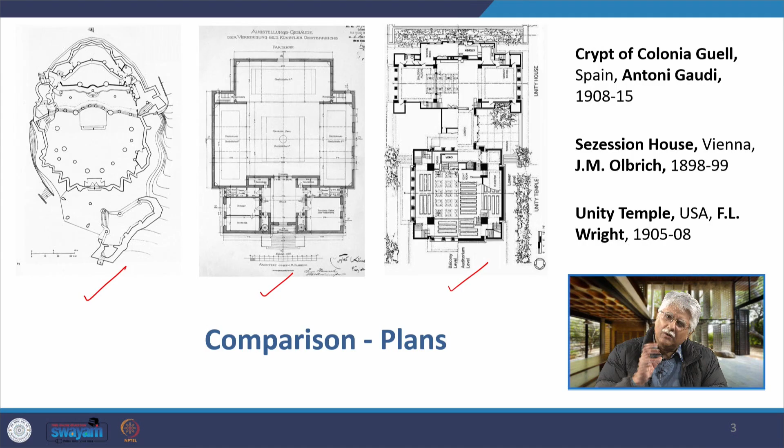Later on we will talk about these concepts called plasticity and continuity, how Wright started looking at buildings' movement not only in the horizontal but also in the vertical direction, and how space should flow freely not only in the horizontal but also in the vertical direction.

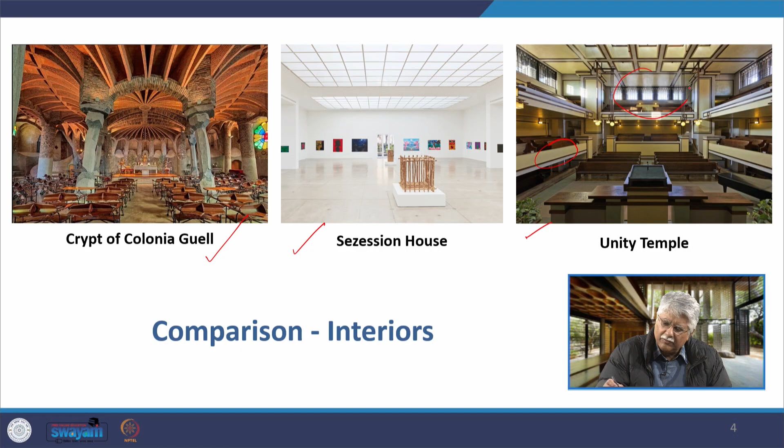How he started coming up with the idea of cantilevered spaces and balconies in a larger space, light coming from above, etc. We will again reflect on these ideas later.

When we come back to the Secession House, we find, as you can see in the plan, it is a very neat and tidy space. Though it has a very strong axis, it is a very modern space with very minimal architecture. It less speaks more in this building.

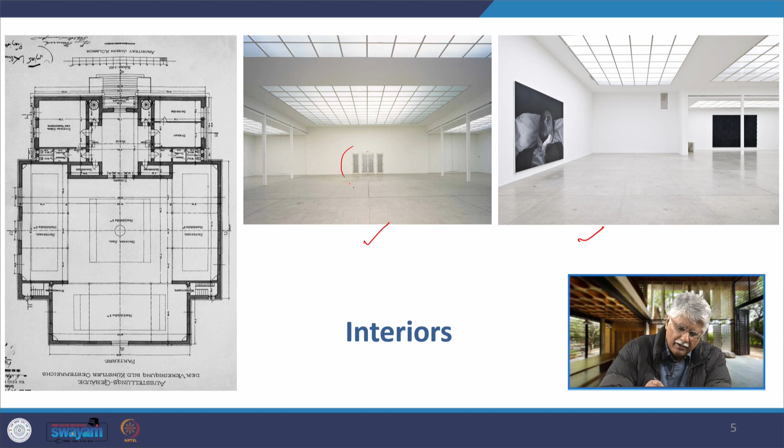You find this interior here and here. This view that you see here—this door, for example, is this door, and this picture has been taken in this direction. This view that you see here is one of the side aisles of this building.

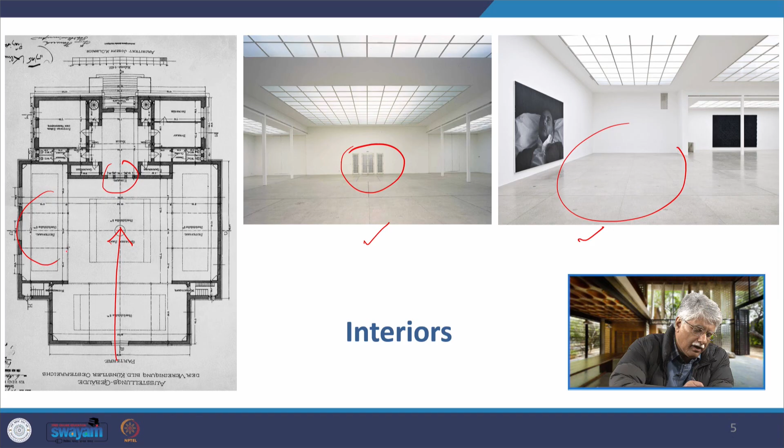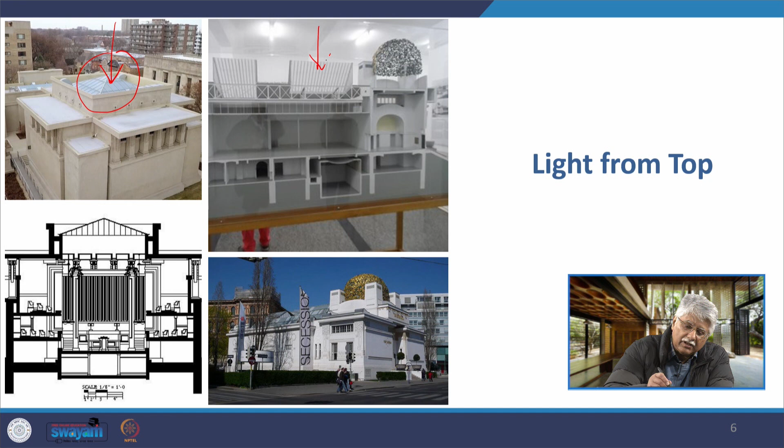Light is captured from the top in both the Secession House as well as the Unity Temple. In the Unity Temple, we find light being captured from the top. And in the Secession House, in this model section that is given here, skylights were given, and light was being captured again from the top.

You can see here the glimpse of the skylight of the Secession House, and this section shows how light was coming in from the top in the Unity Temple, as Wright was also taking in light from skylights above the eye line.

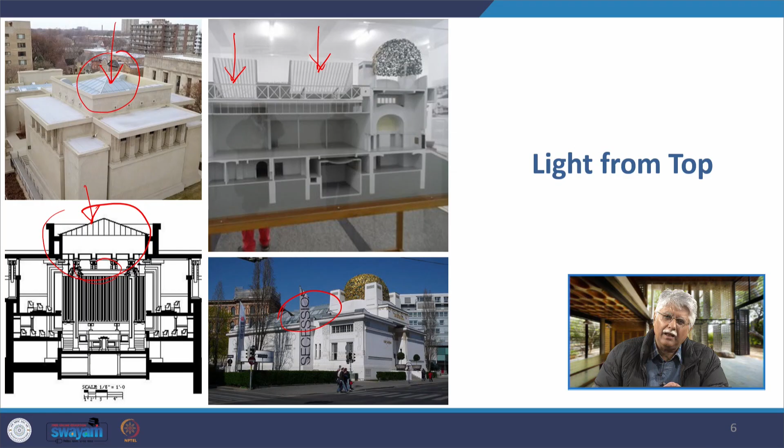Now, if we compare interiors of buildings in modern architecture as they evolve, we find that these large column-free spaces had started coming as a result of new structural systems like RCC and steel, and this happens to be one of the major developments rising out of pure structural technology.

Again, I will make this point here: evolving structural technology, evolving material technology has been fundamental to changes that have happened in architecture. Architecture, again I will repeat, is not the driver of change.

Architecture is driven by change. When change happens in materials, when change happens in structural systems, or even when change happens in economics of countries, or socio-cultural changes happen, architecture also starts evolving, and architecture then becomes a reflection of that change.

That is why architecture is so important when we look back into history and try to understand a civilization, when we try to understand how a people were living in a given era, whether it was Egypt, Greece, or Rome. It is through their architecture that we are able to understand their socio-cultural value systems, their religious beliefs, their economic systems that were in place. Many things we learn about these civilizations, about these peoples, through their architecture. One day when people will turn back and look at our century and our times, they will understand a lot about us through our architecture.

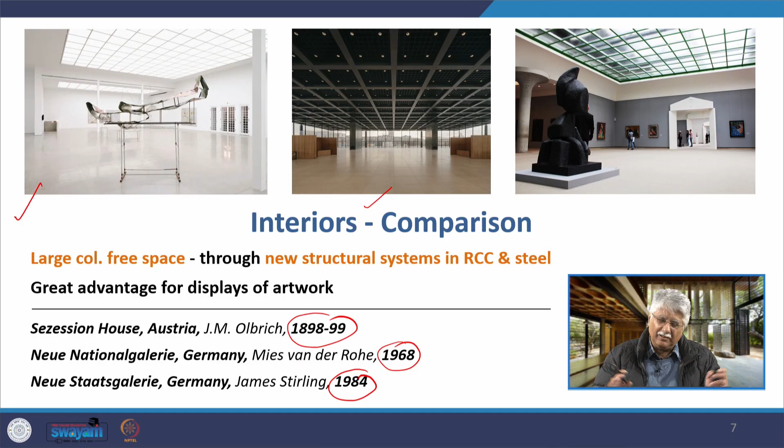Then we have the Neue Staatsgalerie by James Stirling in 1984. All of them are galleries, art galleries. All of them display this example of large span spaces. And then there were many other galleries and museums which reflect the same thing.

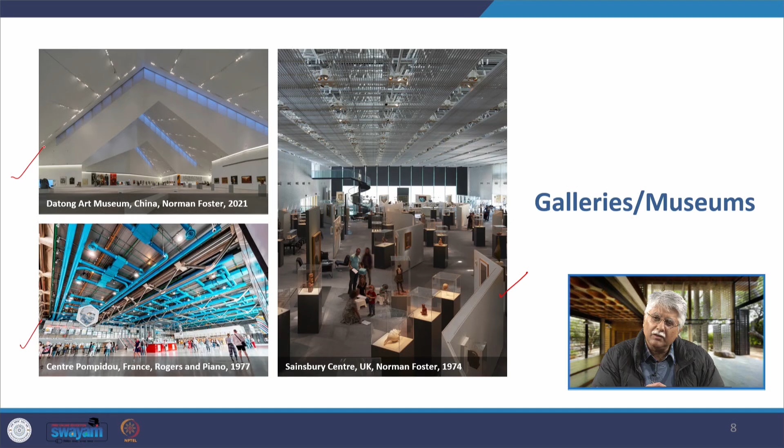All the way up from 1974, the Sainsbury Centre in the UK by Norman Foster, Centre Pompidou in 1977, the Datong Art Museum in China, all the way now very close to our times in 2021.

Then we have the Milwaukee Art Museum that we saw in a lecture before, by Santiago Calatrava. We have the Heydar Aliyev Center by Zaha Hadid. We have the Tate Modern, which is an adaptive reuse building done by Herzog and de Meuron, and we have the Guggenheim Museum in Bilbao, Spain by Frank Gehry.

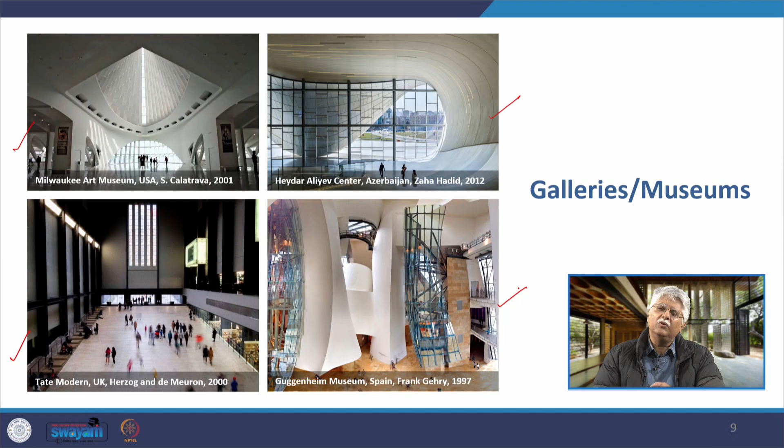Now let us come to what was called mechanomorphic architecture. We have talked about biomorphic, zoomorphic, osteomorphic architecture. Biomorphic means derived from natural vegetal forms, zoomorphic is from animal forms, and osteomorphic is bone structures. Those derivations most radically we have seen in the works of Antoni Gaudí. Mechanomorphic means architecture that is morphed, or derived, from machines.

In the late 19th and early 20th centuries, many elements were inspired by machinery and industrialization, and architects were influenced by these advancements happening as a result of the industrial revolution. Industrial Age 1.0 was truly and firmly in place, and incorporating these concepts and elements symbolic of the industrial age became a kind of trend in architecture.

So we have, for example, the building we will be looking at closely, the Glasgow School of Art by Mackintosh, and we have even buildings like the Postal Savings Bank by Otto Wagner.

Here we find immense use of glass ceiling over the Postal Savings Bank. We find completely exposed steel columns, even with rivets visible in them, and this entire roof in glass has another glass roof above it, which is actually a pitched roof where the snow falls; it bears the load of the snow and is taken off, and then light filters through this ceiling into the main bank working area. Then again there are glass tiles on the floor so that this natural light can somehow even flow beneath, to the floors below it.

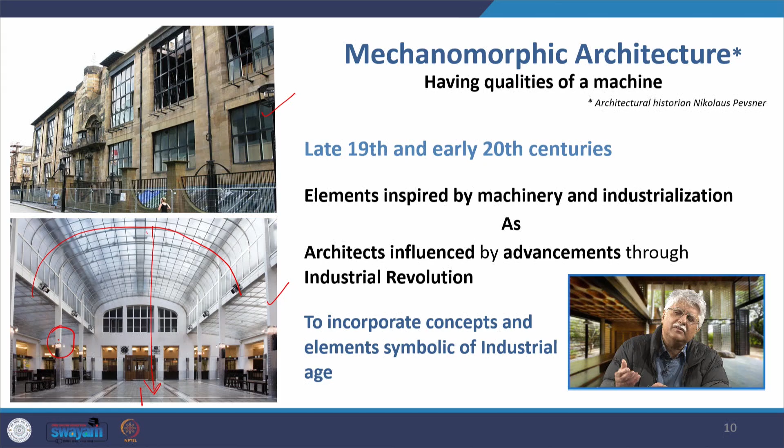Then we also have the building called La Maison du Peuple in Brussels by Victor Horta, from 1896 to 99, which is also a machine-like derivation of a building. Here we find this example of mechanomorphic architecture. It was the headquarters of the Belgian Workers' Party. It had offices, shops, a cafe, and an auditorium.

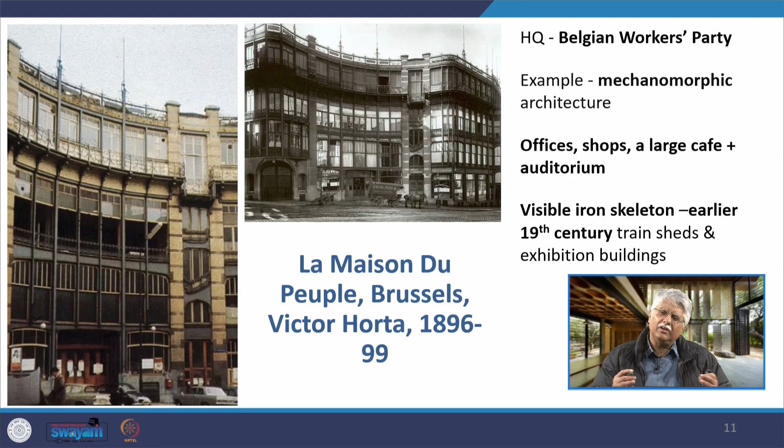And the iron skeleton is a visible iron skeleton, and we've already seen that earlier in the 19th century when we have seen train sheds and exhibition buildings. If not on the outside, at least on the inside, the iron skeleton was visible.

So here we have this. It reflects the influence of both the natural world, because we find these kind of curved or certain Art Nouveau-like elements within the building, but it also shows the technological advances taking place. So we have steel members in the auditorium with rivets visible in them. So both of these are being put together.

We have come to a period in architecture in the Art Nouveau movement where a lot of industrial materials are being used, industrial advancements are being projected in the building. We are seeing the use of exposed steel with exposed rivets, etc. But there is still a restraint because they are trying to convert that into some kind of artistic pieces.

Later on in the 20th century, we find that this kind of conflict completely disappears, and architects start using steel as is, without trying to convert that into some kind of an artistic element.

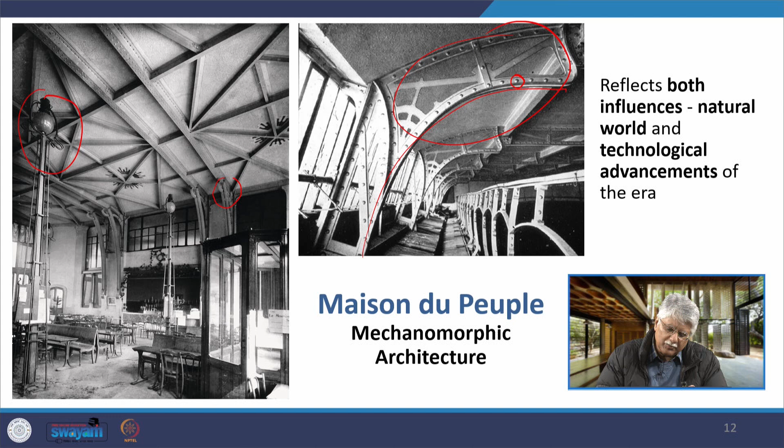So in Maison du Peuple, which is mechanomorphic architecture for you again, there is now what we find a growing harmony between the facade and the interior. One of the things that was problematic about Industrial Revolution architecture was that the exterior and interiors didn't really connect with each other.

When we look at, for example, the St. Pancras station that I talked about earlier, we find the facade is a combination, it's an eclectic facade. It has Greek, it has classical members, it's got Gothic features, Renaissance features, etc., all incorporated within the facade. But when you go on the inside and see the shed, you find that the shed is completely in iron. So it seems as if we are looking at two different buildings. There is a disconnect between the outside and the inside.

But when we come to the Maison du Peuple, slowly and surely there is a connection between the outside and the inside. The building starts speaking the same language. On the outside also we see the building is machine-like, and on the inside there are these exposed steel members responding to the industrial age.

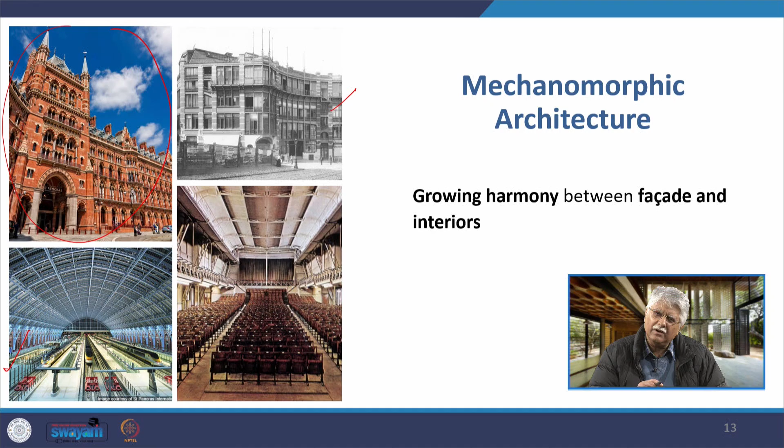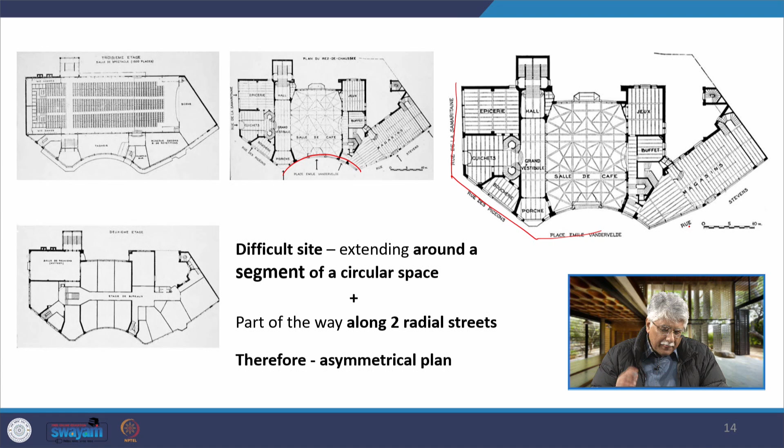So this building was actually built on a difficult site because it extended around a segment of circular space that you see here, and part of the way it was along two radial streets, and so the plan itself is totally asymmetrical. And now another building came up in the 1970s which is called the Willis Faber Dumas.

Like I told you in the earlier lecture, I will continue to do this. I will continue to connect the buildings of an earlier period with the buildings of a later period, so that you can see how there is a connection in how the buildings have evolved, how the past buildings are connected with the buildings of today.

In Willis Faber Dumas, it reinforced the urban scape in which the building was present. In that, this building also had a very asymmetrical site, and the entire envelope of the building was along the asymmetrical site. It was a very free-form plan. It was a low-rise construction responding to the scale of the surrounding buildings.

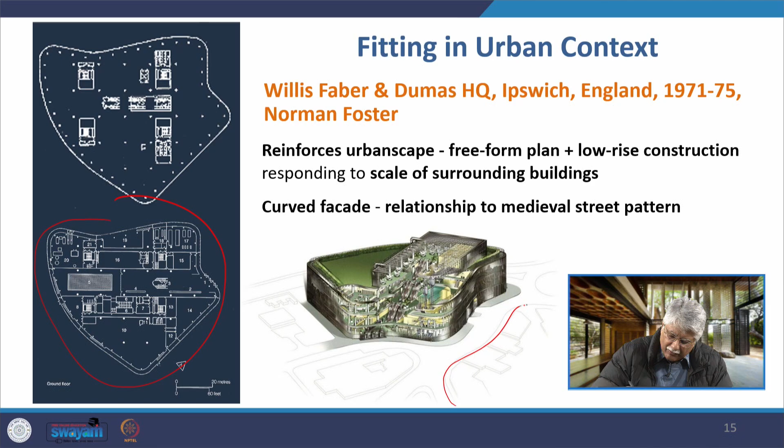It was a very curved facade, and that was in relation to the kind of medieval street patterns that you are able to see here around the building. So it fitted in the urban context.

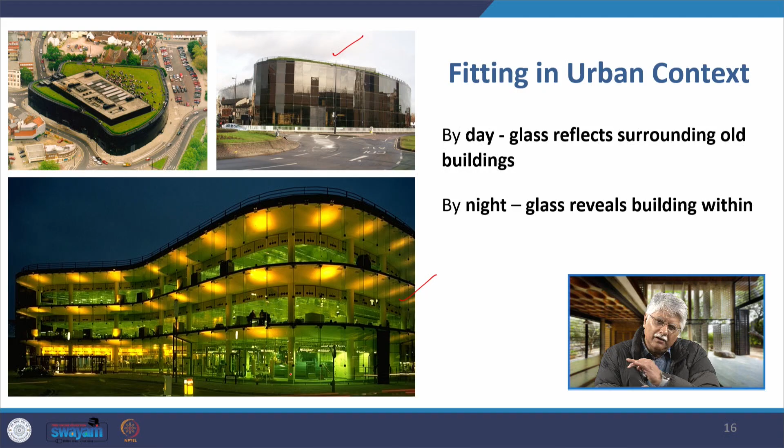By day, the glass reflects the surrounding old buildings. You can see that here. And by night, the building reveals itself. The building reveals its interiors to us, and this is that period, that era had come when the buildings were in complete glass envelopes.

Even the in-between mullions, etc., had more or less disappeared, and it's a continuous glass facade reflecting the interiors. Moreover, it was also an early example of energy-conscious design. It was a very deep plan. It had an insulated grass roof when the concept of green roof had not yet come in, but this building has a grass roof or a green roof, ensuring good thermal performance, and it was planned on a flexible 14 square meter structural grid. So this turned out to be one of the seminal buildings of that period, and it is part of the high-tech architecture group.

This is the work of Norman Foster, so it falls within that purview, and we will reflect on this hopefully again in later lectures.

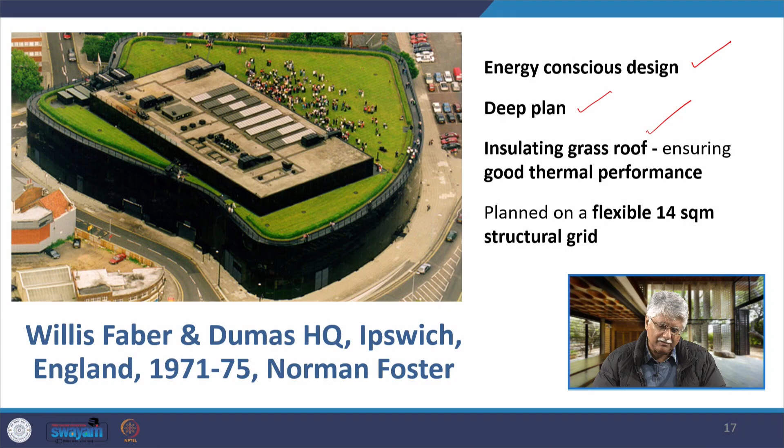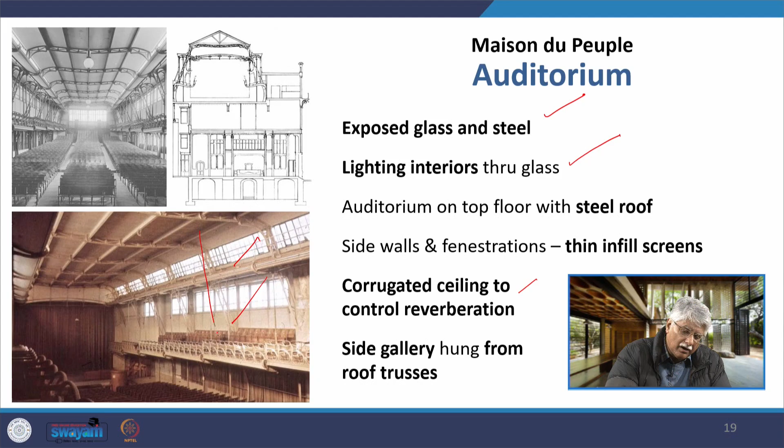It's a corrugated ceiling in order to control the reverberation, and the side galleries have also been hung from the roof truss.

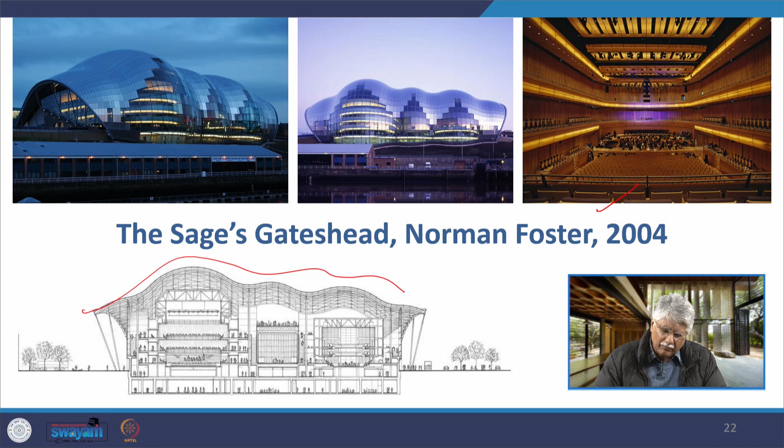Now if we look at Sage Gateshead a little more closely, like I said, it's an example of a single envelope design, and in the section you can see the glass envelope, which is in a very wavy form enclosing this entire space.

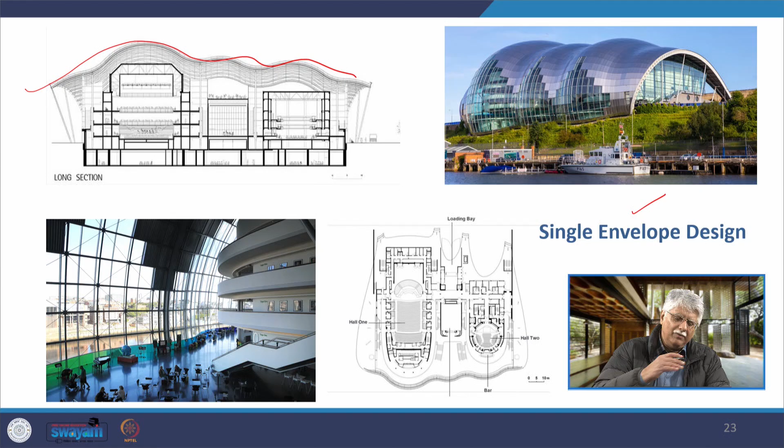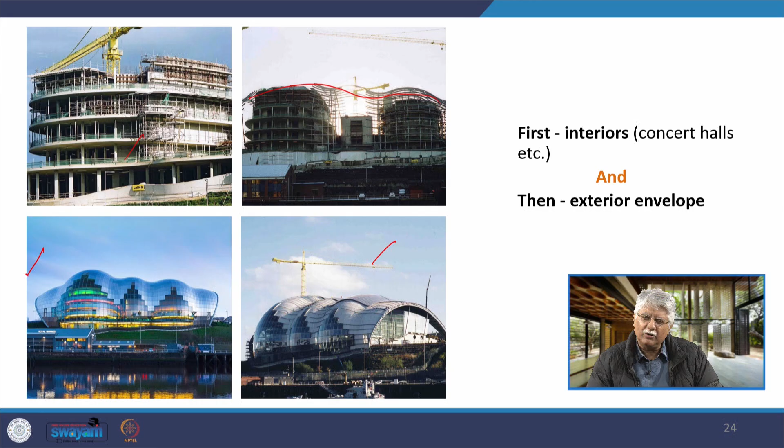When the building was constructed, it was built inside out. First the interiors were constructed, that is the concert halls, etc. Then the envelope was generated or constructed over it, and thus the exterior envelope was made on top of it. So the outer glass and steel shell encloses 3 concert halls, bringing them together as one.

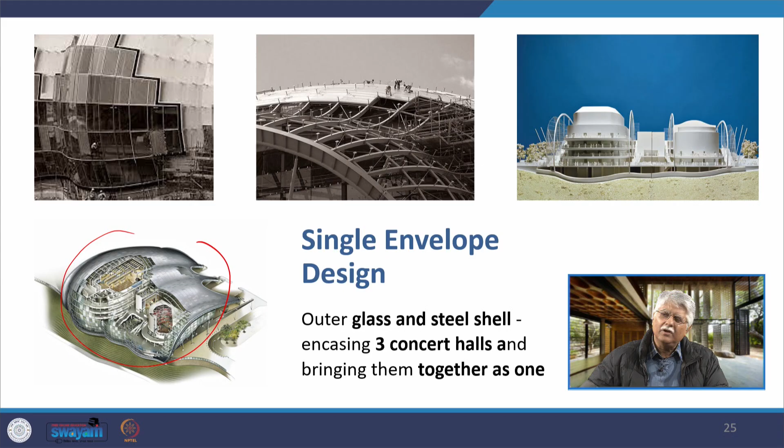This is a concept that we see repeatedly happening in modern airports, where there is a single envelope enclosing many facilities within it.

Now coming back to the building that we want to focus on today, which is the Glasgow School of Art, or GSA, by C.R. Mackintosh. This is called the GSA Mackintosh building.

The Glasgow School of Art is several buildings. This one was designed by C.R. Mackintosh, and he was a prominent architect of the movement coming from Britain. Mackintosh's architectural masterpiece is the Glasgow School of Art, and it is a mechanomorphic interpretation.

As you can see here, even in this example, it is a very heavy looking building. It's made out of stone, but the structure of the building is actually RCC, and the stone is used as a cladding material. Why do I say this is an RCC frame structure? Because of these very wide glass openings that have been provided, which point us in the direction that the building has a frame structure.

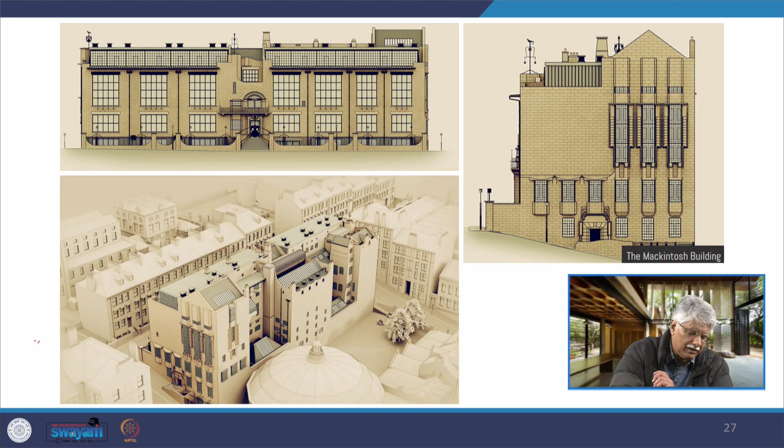This immense use of glass in the facade is the library part of the building, and light is also filtering in from the top, which we will look at. These are the drawings, and this is the 3D model or 3D view of the building. UG, PG and PhD courses are offered in architecture, fine art and design at GSA.

Art Nouveau features, when you observe closely, include the wrought iron gate here, and these wrought iron elements that are provided in front of the glass windows.

The entrance of the building, and in fact the overall way stone has been used, gives the resemblance of a castle. The entire facade at the entrance resembles a castle, and the building has a very solid and simple geometry in a plain facade using stone and glass. Interiors are in wood, iron and glass.

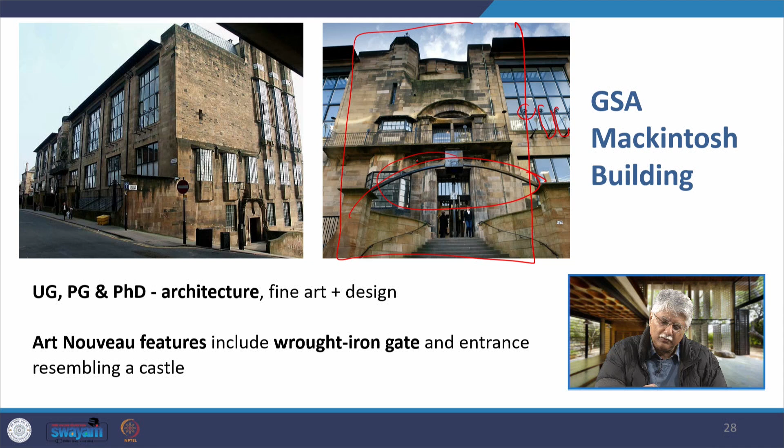Now one thing I want to talk about is the idea of asymmetry in symmetry in architecture. When you look at the overall building, it looks symmetrical, but at the center part, from where the central axis can be taken, you suddenly find that Mackintosh breaks the symmetry. This entrance gate is not symmetrical. If you look closer, you find it is off center. He could have easily made it completely symmetrical, but breaking the symmetry creates a certain kind of interest in the building.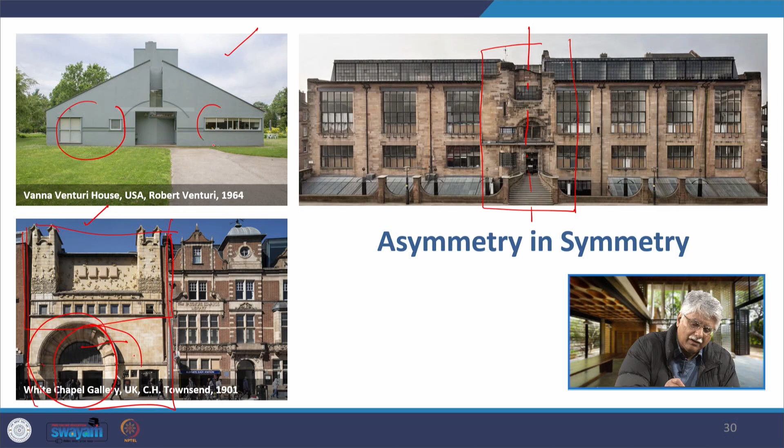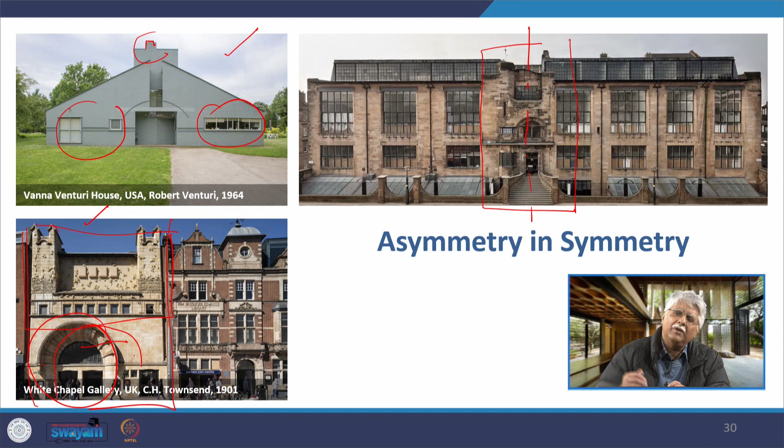The overall form is symmetrical, but the chimney has a member which is off center. The overall building is symmetrical, but there are these points of asymmetry within it. So this is called asymmetry in symmetry. I am pointing this out to you in the hope that these points will help you when you design your projects.

Another way of looking at architecture is when a building is perfectly symmetrical, like you find in the Taj Mahal, or perfectly asymmetrical, like you find in Frank Gehry's buildings. You find very strong symmetry in modern architecture also. Symmetry is not just confined to classical or Egyptian architecture. We find it in the Bangladesh assembly, the Jatiya Sangsad Bhaban in Dhaka by Louis Kahn, in the Louvre Pyramid in Paris by I.M. Pei, and in the TWA terminal in New York by Eero Saarinen in 1962.

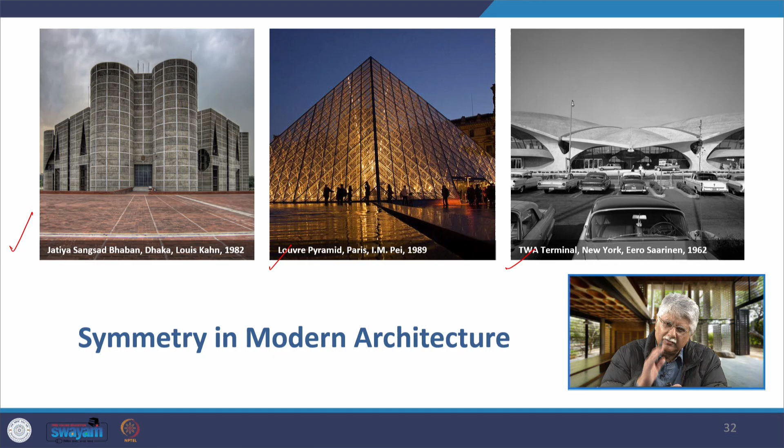In these buildings, whether in glass or RCC, whatever the cladding material, they all had very strong symmetry. We find symmetry even in skyscrapers: the Petronas Towers in Kuala Lumpur by Cesar Pelli, our own Lotus Temple in New Delhi by Fariborz Sahba, and the IST building at Florida Polytechnic by Santiago Calatrava. So there are three ways: perfect symmetry, perfect asymmetry, or asymmetry within an overall symmetry.

When we look at the plan of the GSA building, we find it's a modern rational plan. It might be coming out of our own design studios. Very simple, straightforward, and based on the building's function. This is one of the early examples where architects kept function on priority over form. In the past, form superseded function. This change started with neoclassical architecture, gradually penetrated architecture, and by the 20th century it was taking very strong roots.

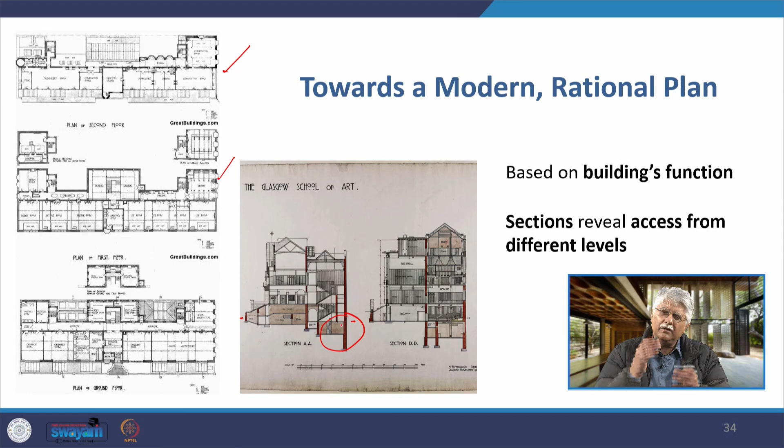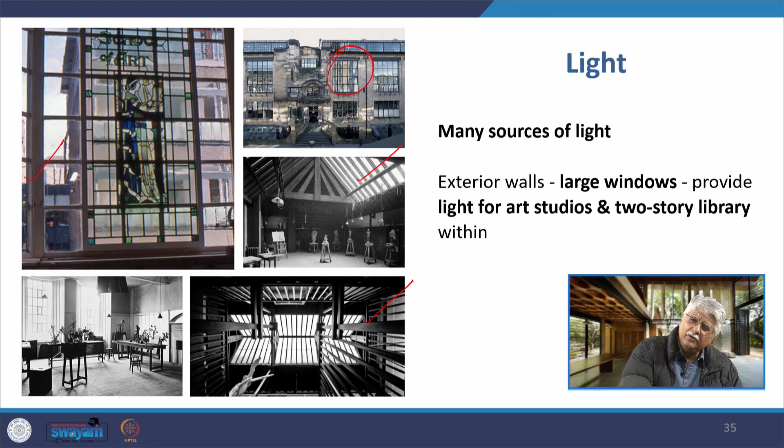The section reveals access to the different levels of the building, because of the two roads on either side; one road slopes downwards, and they have taken advantage of that with access at different levels. Light comes in directly from the glass facade, from skylights, and from large windows in exterior walls for the art studios and the two-story library. The extension of the Glasgow School of Art was the Seona Reid building, designed by Steven Holl.

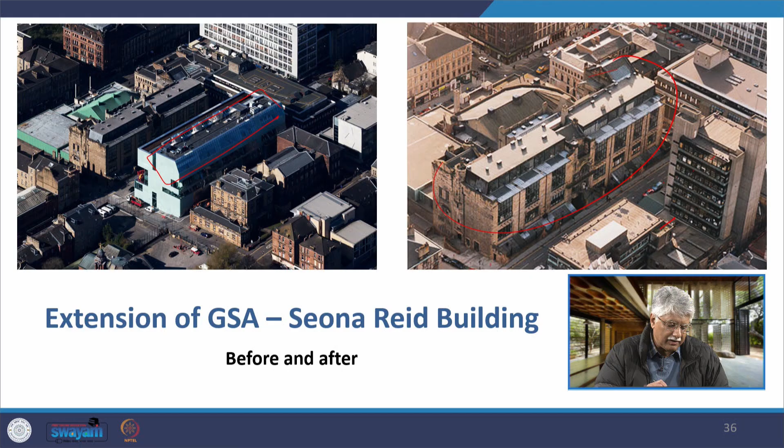In this picture, the Seona Reid building is not there. You see the Glasgow School of Art here, and this is what the site used to be. In this picture, the building has come up here. This is the Seona Reid building, done by Steven Holl as an addition to the Glasgow School of Art. I am discussing it because I want to talk about complement and contrast in architecture. When a building gets an addition, you can complement it completely, contrast it completely, or have a mix of both.

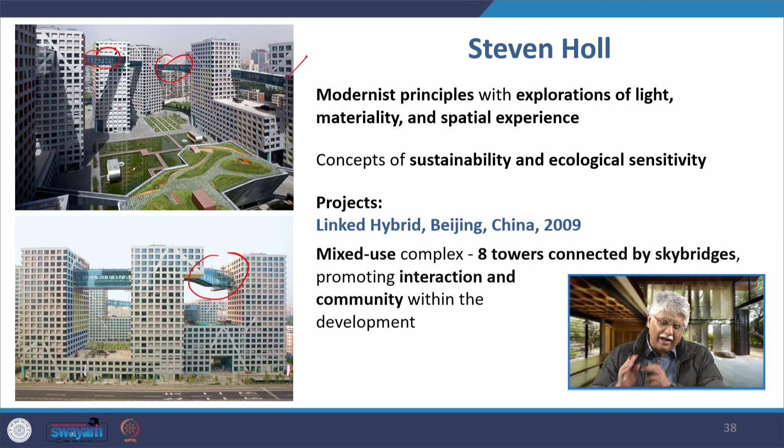Steven Holl has based his architecture on modernist principles, explorations of light, materiality, the use of materials in construction, and the overall spatial experience. He focuses on sustainability and ecological sensitivity. For example, the Linked Hybrid project in Beijing, China, in 2009 is a mixed-use complex with 8 towers connected by amazing sky bridges, promoting interaction and community. Steven Holl also provided the extension of the Nelson-Atkins Museum in Kansas in the US, and this is the existing building.

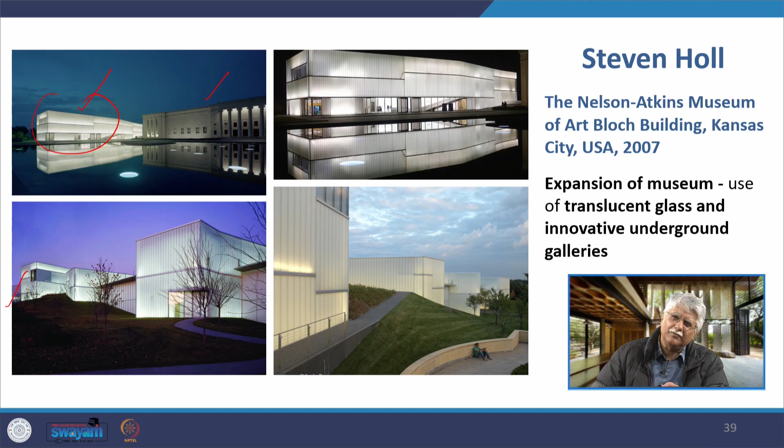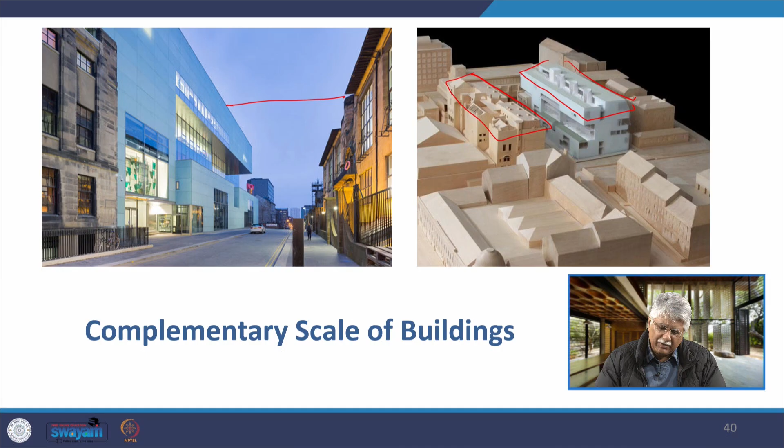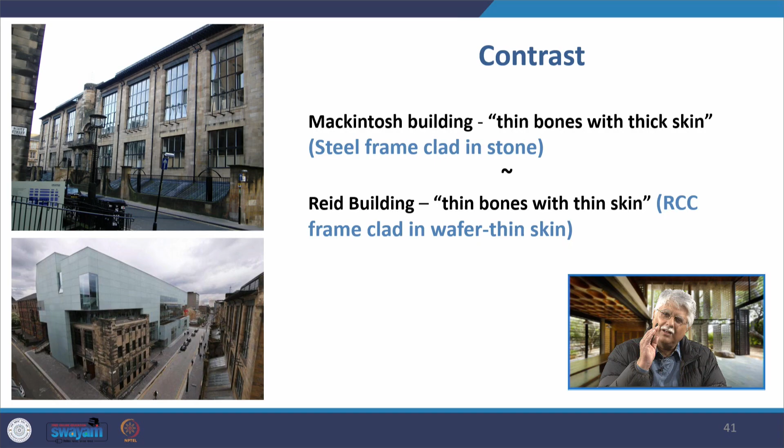The contrast is the Mackintosh building can be said to be thin bones with thick skin. It has got a steel frame, I am sorry, not an RCC, but a steel frame clad in stone, whereas the Seona Reid building is thin bones with thin skin. It has got an RCC frame clad with a very, very thin skin on top of it, and that is how he has done it.

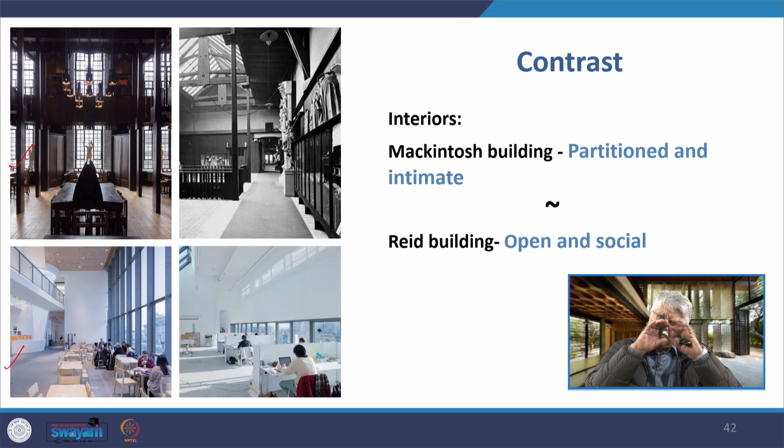And the interiors, Mackintosh's building is partitioned and very intimate. The Seona Reid building, on the other hand, is very open and it is more social. So you find the use of darker colors within the Mackintosh building makes it more intimate. You find the use of lighter colors and the feeling of much more lightness, or the overall light penetration also is greater in the Seona Reid building.

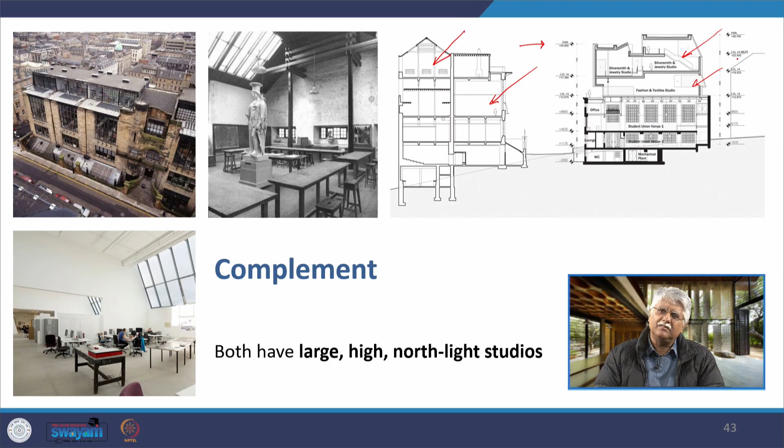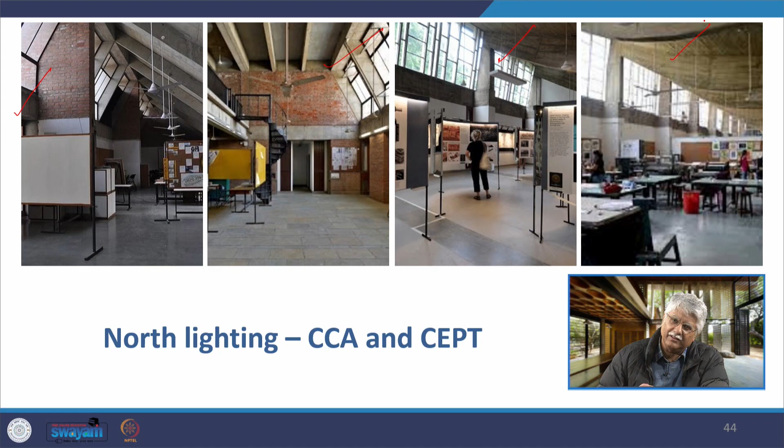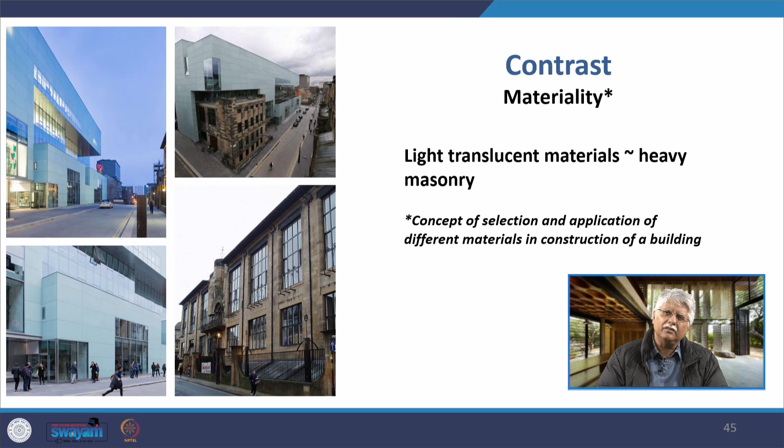The contrast is in the materiality. Materiality is the concept of selection and application of different materials in the construction of a building. Here in the Seona Reid building, he uses light and translucent materials versus heavy masonry used in the Mackintosh building. Now, there is tremendous transparency in both the buildings. There is transparency in the GSA in the way that it brings in a lot of light inside the building, and that continues in the Seona Reid.

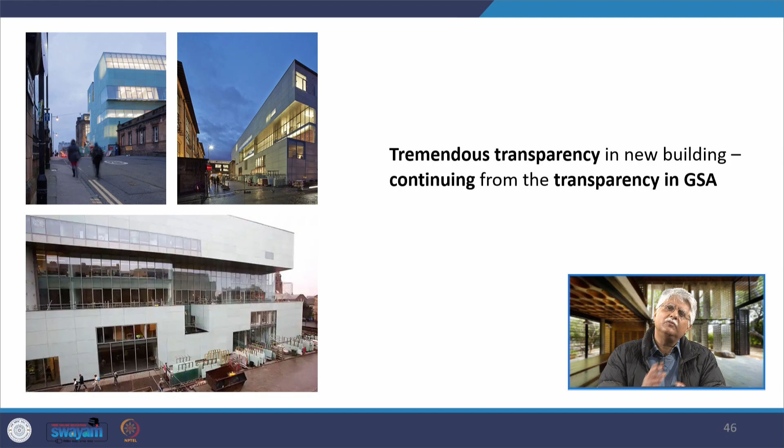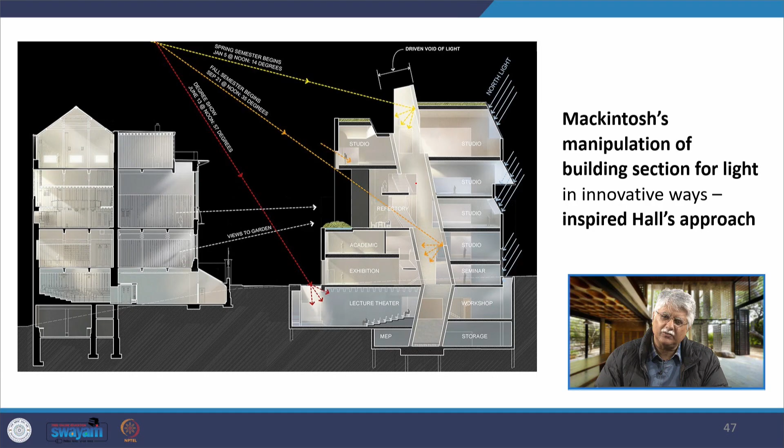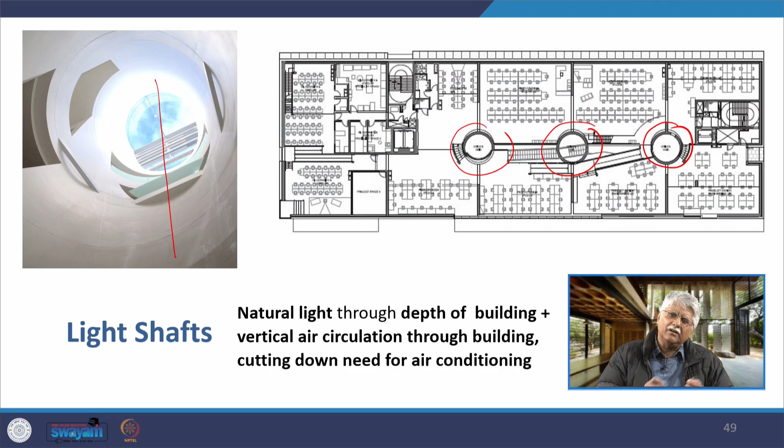Mackintosh's manipulation of the building section for light is an idea that has also inspired Hall's Seona Reid, and he also manipulates the section of the building to pull in maximum natural light. Another idea that GSA uses to pull in light is the use of a light shaft in the center of the building. In fact, as you can see in the plan, there are 3 such light shafts, in which natural light comes deep into the building, and it also aids in vertical air circulation through the building and cuts down the need for air conditioning.

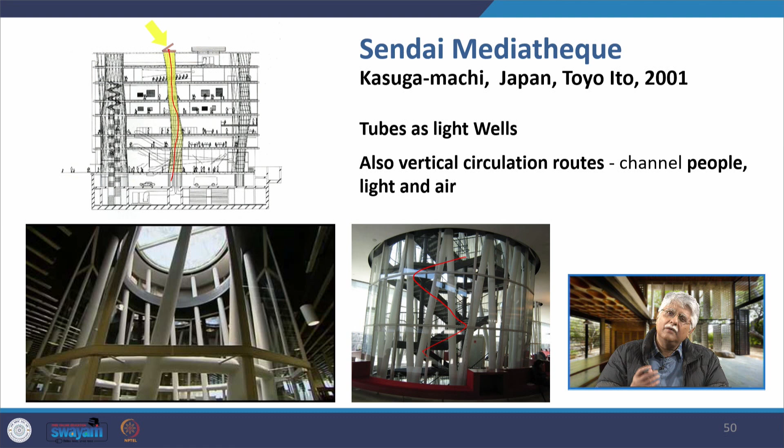This concept of a light shaft is also seen in the Sendai Mediatheque, and it is used in this project, which was done in 2001, in a much more complex way. These light shafts are actually tubes which are also the supporting vertical members of the building, and these tubes act as light wells. They are also used for providing vertical circulation through staircases or even elevators, so we can use them for vertical circulation of people and for bringing in both light and air into the building.

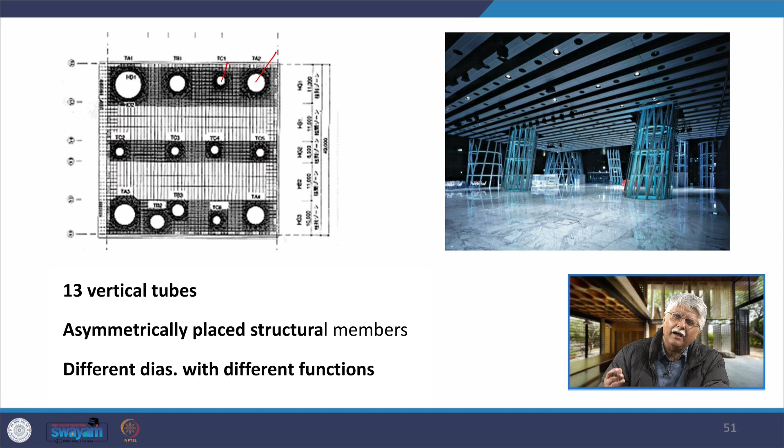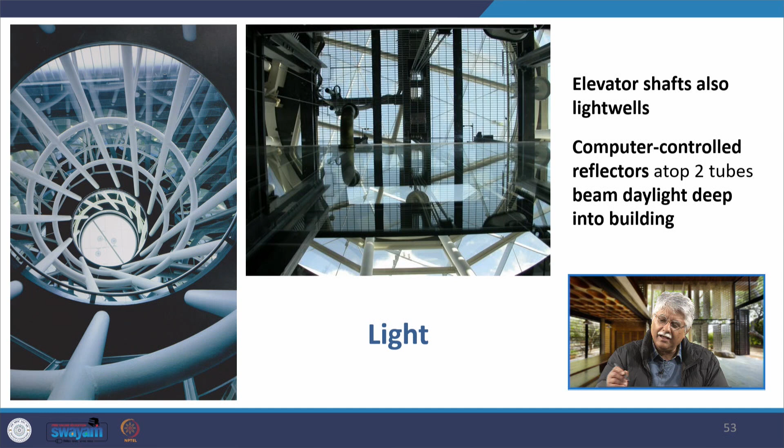So it has got these 13 vertical tubes, contrasting from one another, asymmetrically placed structural members. These tubes are actually the column supports of the building, and they have different diameters and are used for different functions. So the light is also entering into the Sendai Mediatheque through these vertical tubes, as you can see here, and the elevator shafts also work as light wells.

One more thing about this building is that it has got varying floor heights. It doesn't have the same height. Now, what is a mediatheque? Let's look at that. It initially began with the idea of building a library, but then they realized that now libraries are not only about books, libraries are also about multimedia.

Therefore, they came up with the idea of having a mediatheque in which it will not just be books, but varying medias and videos and digital libraries, etc., all put together in this one building to be used by the people. And based on the function, different levels have different functions. The heights of these different levels is also varying. How did they achieve that is very interesting.

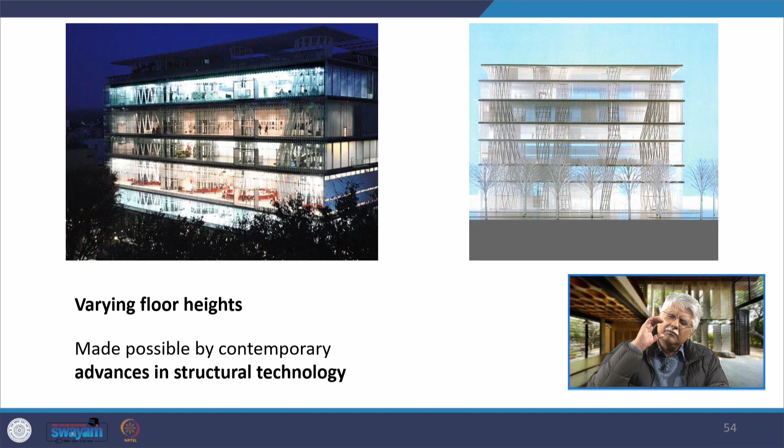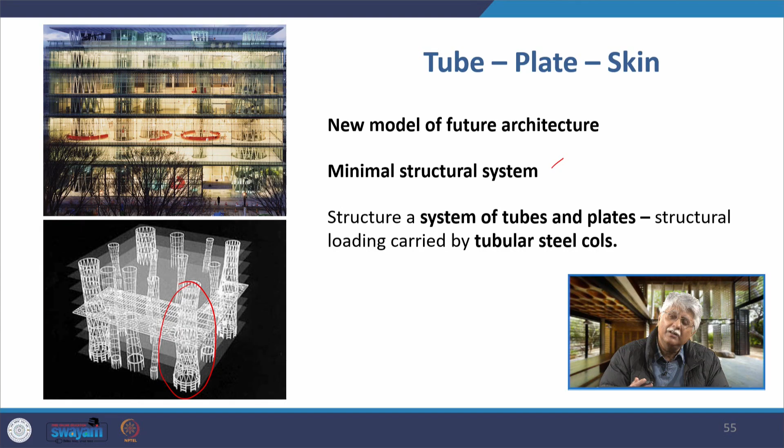This is one of the most innovative structural buildings that we find in the 21st century. It is in fact a new model for a future architecture, because the structural system in fact is minimal. It is a system of tubes and plates. The structural load is being carried by these what I termed as light shafts in the Seona Reid building, light tubes here. So these tubular steel columns not only are working for bringing in light or vertical transportation, but they are actually the steel columns of the building.

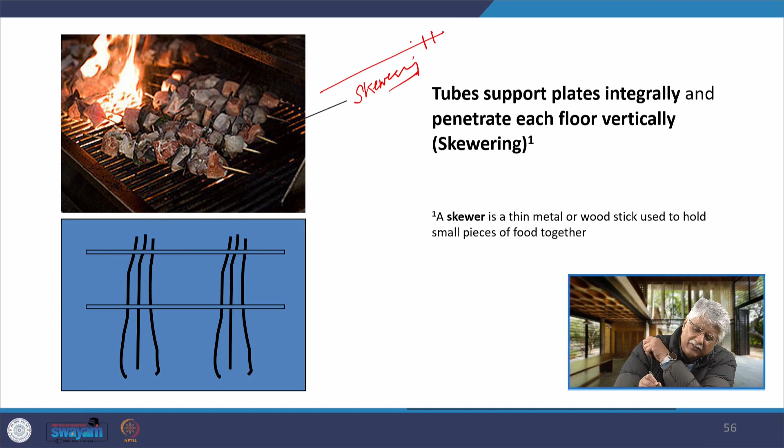Now how does it work? It's based on a simple concept of skewering. In skewering, if you have ever seen how kebabs are made, in any form of kebabs, you find that there is an iron rod that is used for what is called skewering. You keep on adding the pieces of the material, eating material, on the iron rod like that, and when you have the rod, you keep on piercing the material one after another like that, and then you cook it. This skewer is a thin metal or wooden stick which is used to hold these small pieces of food together.

Now in the Sendai Mediathek, this is what they have done. They have taken these columns and they have skewered the floors of it. So now when you are skewering the floors, you can decide to keep the height of the floors different. Based on where you want to have the floor, you can skewer it there, right. So each floor, the tubes are supporting these plates integrally and penetrate each floor vertically. So this kind of structural system is not having columns supporting a slab and then the column continues in supporting a slab. This actually has columns running through and through supporting slabs which are also at varying heights from one another. Very interesting system. I have told you in a very simple way.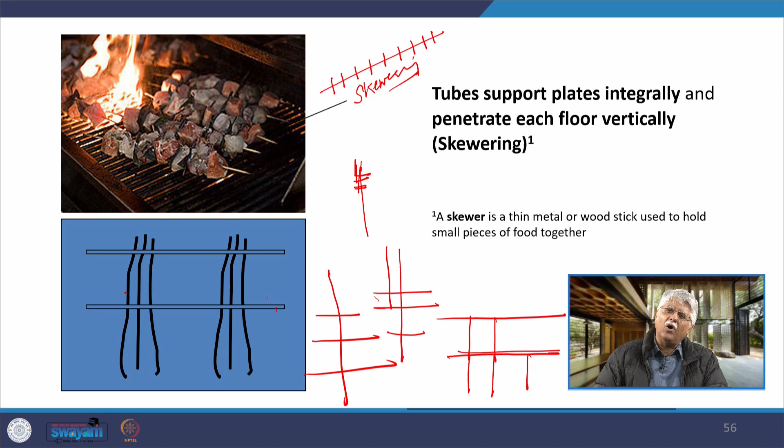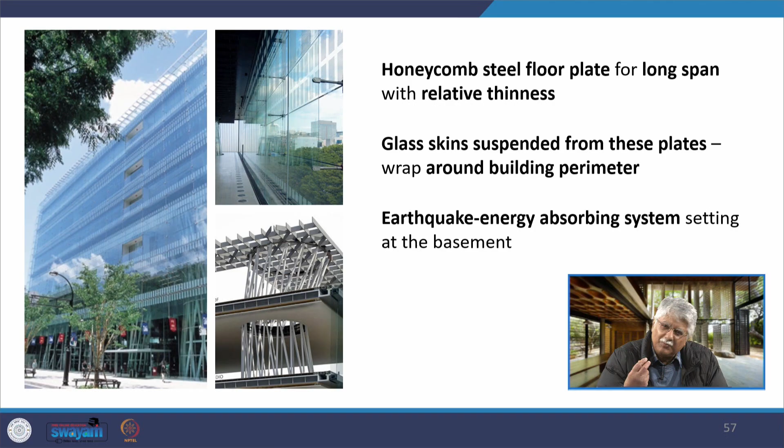The engineer behind it is Sasaki, and I would like you to go online, you can read that paper, because this was a very complicated structural system that Ito had thought of, and Sasaki was able to implement his idea into this building. It has got a honeycomb steel floor plate which is relatively thin and is able to take the long span of the building. The glass skin is wrapped around the entire building which is suspended from these floor plates, and it has also got an earthquake energy absorbing system in the basement. This is one of the more futuristic buildings that have come up in terms of the structural innovation it has brought into the 21st century.

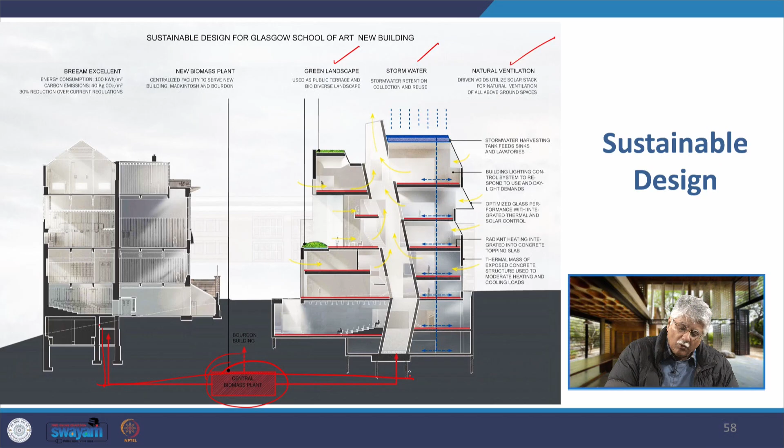Coming back to the Seona Reid building and GSA, we find that they both exhibit sustainable design. The Seona Reid building has incorporated green landscape, storm water management, natural ventilation is already there, and it has also built in a new biomass plant which is being used, and it is connected both to the older GSA building and to the Seona Reid building.

Now coming to the Purkersdorf Sanatorium, I am talking in continuity about mechanomorphic architecture and how it was leading on to the early buildings of modernism. I was focusing mainly on C.R. Mackintosh and the GSA building and how it was emblematic of the radical change that had come in through the Art Nouveau movement, using of natural forms, etc. The Art Nouveau movement lasted a very short time, 1890 to 1910. The use of natural forms, like the way Victor Horta has used them and more radically how Gaudi had used them, that also more or less disappeared after 1910. But what remained from the Art Nouveau movement was this mechanomorphic derivation.

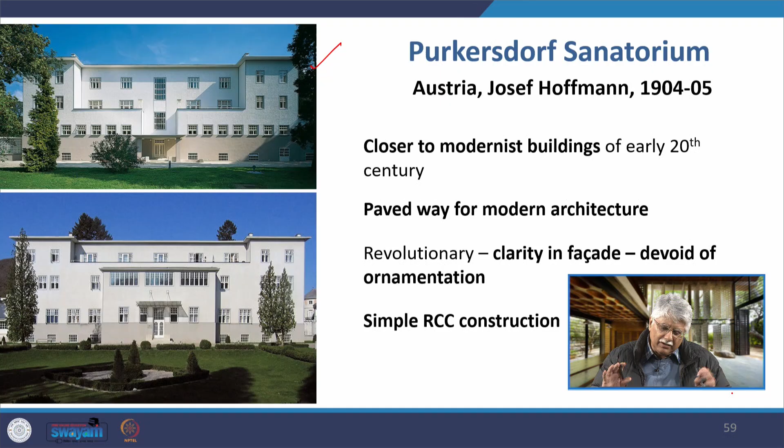All those changes that happened in Art Nouveau were ultimately leading to buildings like this, the Purkersdorf Sanatorium in Austria by Josef Hoffmann. It is closer to the modernist buildings of the early 20th century and paved the way for modern architecture. It is revolutionary because of the clarity in the facade. It is devoid of all ornamentation. It has got a very simple RCC construction. There is both simplicity in elevation and the interior spaces. There are some elements related to Art Nouveau architecture in the interiors, but in general it is a very modern looking building, as I would put it.

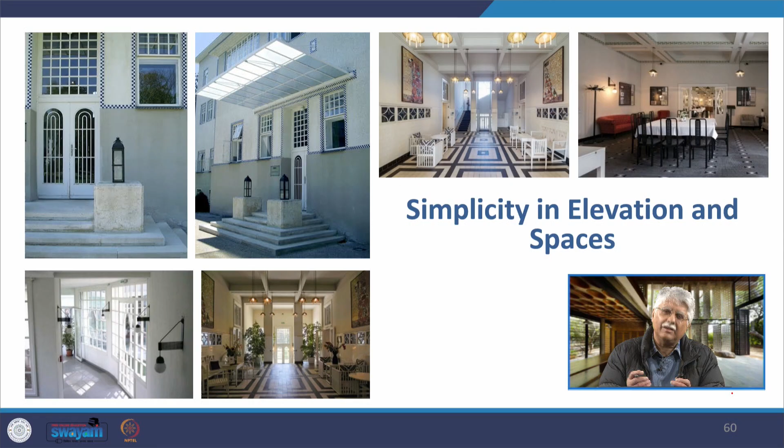Over time, the need for sanatoriums disappeared because of new treatments that came in. Tuberculosis no longer needed isolation. Therefore, buildings like the Paimio Sanatorium have now taken on other purposes over time, but the buildings still exist.

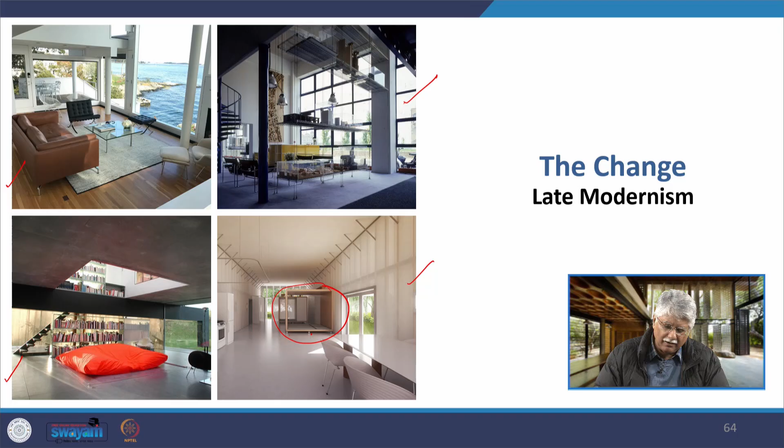Modernism was thus getting firmly established in the early years of the 20th century. What is modernism? It is the rejection of traditional forms and adoption of new technologies and materials—the use of industrial materials like steel and concrete—with the fundamental concept given to us by Louis Sullivan, who said form ever follows function, reduced in modern times to the simple dictum: form follows function. There is simplicity with clean lines and clean geometric shapes, unornamented and plain facades.

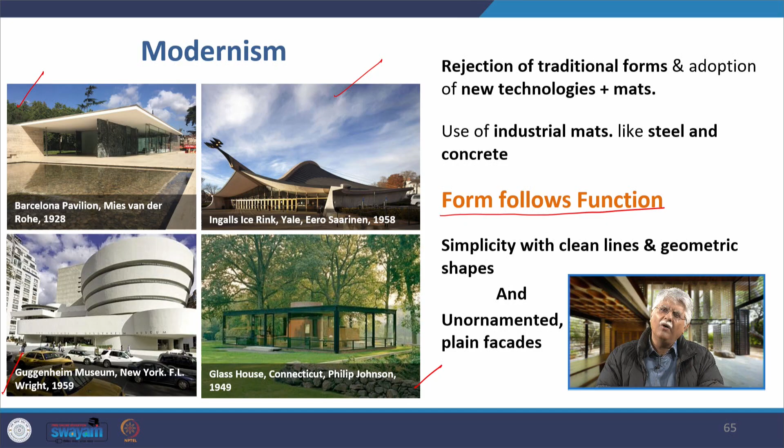Examples include the Barcelona Pavilion by Mies van der Rohe in Barcelona in 1928, the Ingalls Ice Rink by Eero Saarinen in 1958, the Glass House by Philip Johnson in 1949, and the Guggenheim Museum by Frank Lloyd Wright in 1959. All these buildings are a part of modernism.

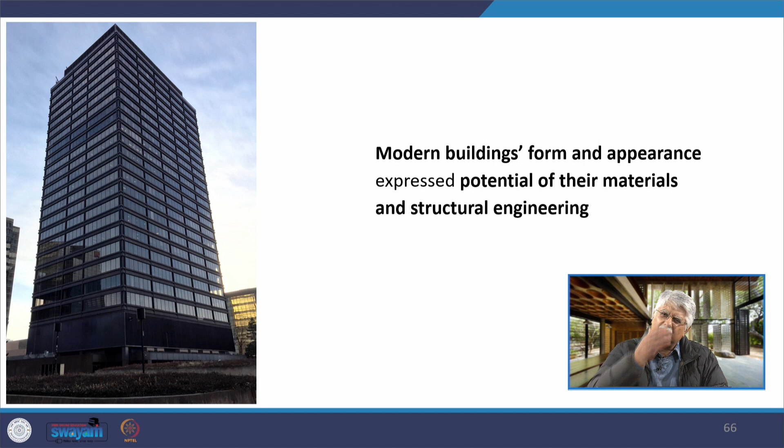Modern buildings' forms and appearance expressed the potential of materials and structural engineering. Architects were willing to express the building's structure right in front, not covering it up with aesthetics and ornamentation. The masters of modernism are Walter Gropius, Le Corbusier, Mies van der Rohe, Frank Lloyd Wright, and later architects like Richard Neutra, Richard Meier, J.J.P. Oud, Philip Johnson, Eero Saarinen, Kenzo Tange, Tadao Ando, and Pierre Koenig—some of the iconic masters of modernism.

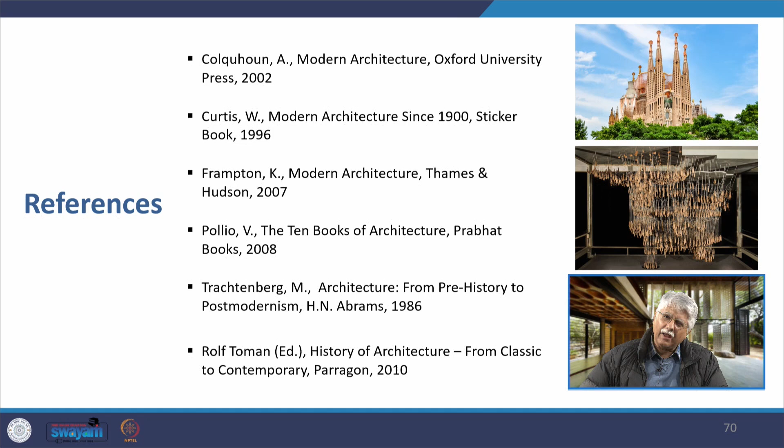We will end with this, and we will again come back and talk more.

In the next presentation we will talk about the rise of the skyscraper and the Chicago School movement, which ran more or less parallel with the Art Nouveau movement in Europe, and how it led to the evolution of the modern skyscraper. By completing that presentation, we would have reached somewhere around 1900-1910, both in Europe and in America.

Then we will step into the world of modernism and talk about some modernist architects. But before that, we will begin that study by looking at four important architects: Frank Lloyd Wright, whose works began around 1893 and continued into the 20th century, Mies van der Rohe, Le Corbusier, and Walter Gropius—the four great masters of modernism—and then take on our architectural study from there.